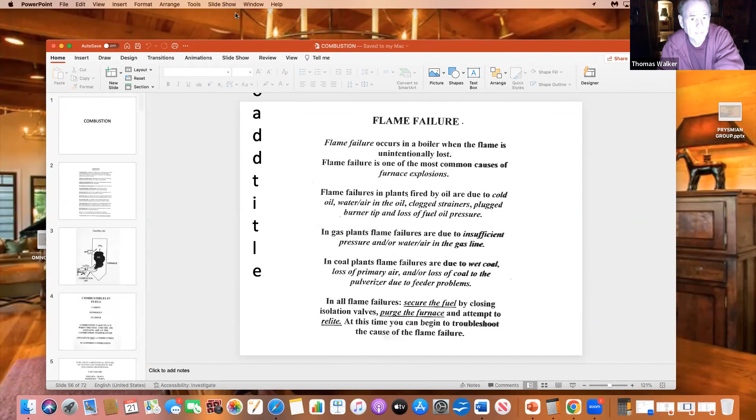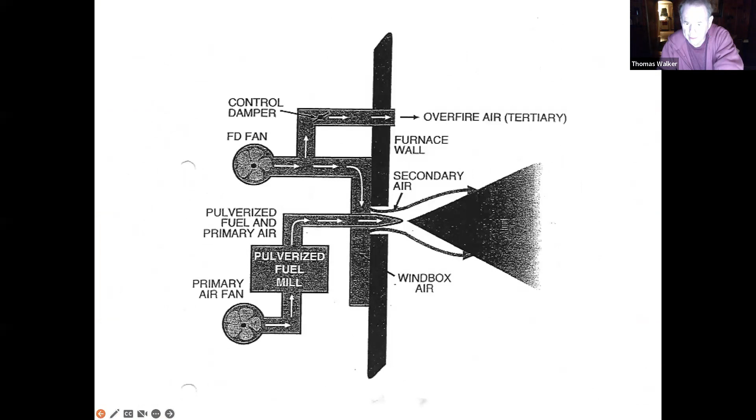On tonight's agenda is combustion. That combustion section, hold on a minute, let me get back to the page here. Should be the next section in the book. And basically how it starts is with a bunch of definitions, just like every other section.

All right, what you need to know about combustion. Combustion is something they taught you in 4th grade science, everybody knows what it is. The way it's worded on the state exam, it's defined as a chemical process in which a combustible unites with oxygen, producing heat and often light. And the way that question's set up, they give you the definition with a blank in front of it, so all you really need to do is memorize the definition of combustion to answer that question correctly. Even if you looked it up in the dictionary, which says the rapid union or oxidation of an element or compound with oxygen that results in the production of heat, you'd get it right.

So I don't care how you remember it, but they're going to ask you, what is combustion, or what is the definition of combustion? So you know that's coming your way.

In the combustion world, in our actual day-to-day practice, I think everybody gets it that combustion happens continuously in a boiler, and in this day and age it's automatically controlled. The only thing an operator has to do is periodically check, see how it's doing, make sure everything looks good.

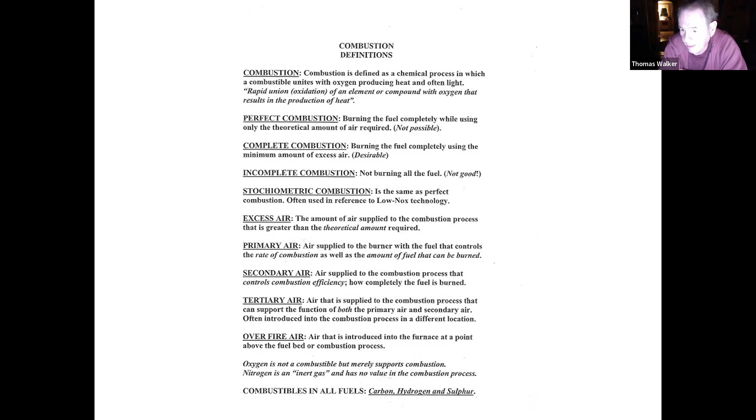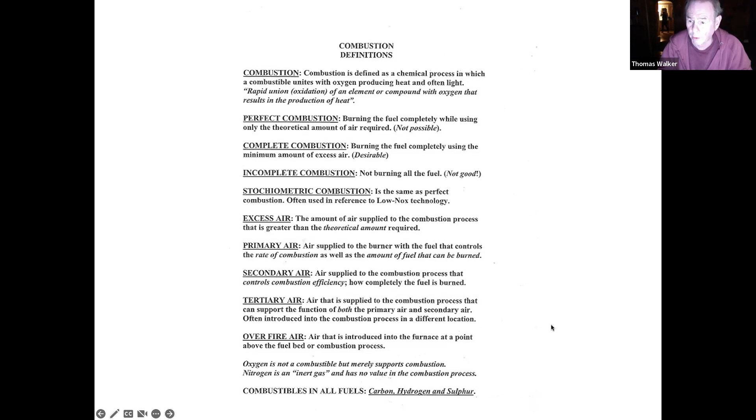Now, for third engineers and first firemen, they're likely to ask you about tertiary air and overfire air. Typically they don't ask second firemen, but let me give you an example. When you have a fuel that's difficult to burn, I'm talking any solid fuel like coal or trash, part of the problem is this: we put the trash in the boiler, in the furnace, and we hope that it burns in suspension.

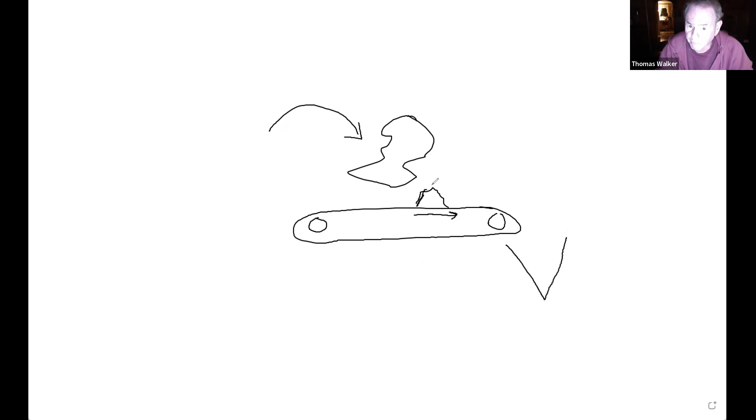However, because it's a difficult fuel, some of it often lands on this traveling grate, which is moving pretty slowly in this direction. When it gets to the end, what's on the grate dumps into an ash hopper where we collect the ash. In trash plants, to make sure that this unburned fuel has an opportunity to burn, they often introduce tertiary air under the grate to make sure that we get complete combustion before this dumps off into the ash hopper.

The object of the game is to burn the fuel completely. I think everybody understands the concept of overfire air. If this was the combustion process here, any air that I introduce up here will assist in getting complete combustion. Typically what they say in most combustion processes is: right here, the fuel is burning to CO, and the addition of that overfire air allows that fuel to burn completely to CO2. Does this make sense?

Now, they won't beat up a second fireman on this because you haven't been in the industry, but this is a favorite question for first fireman, third engineers, especially if you're a veteran of a trash plant.

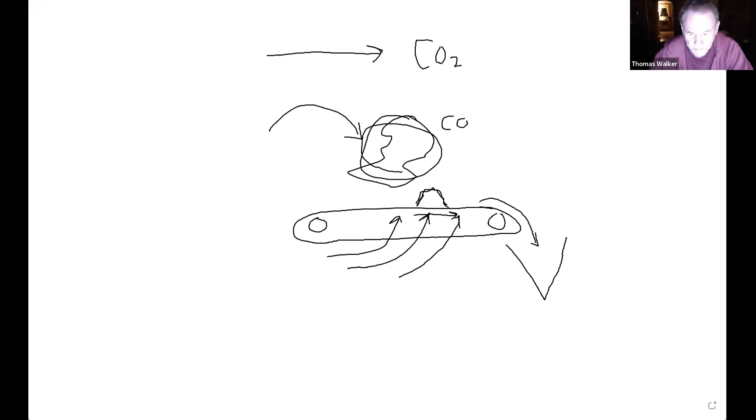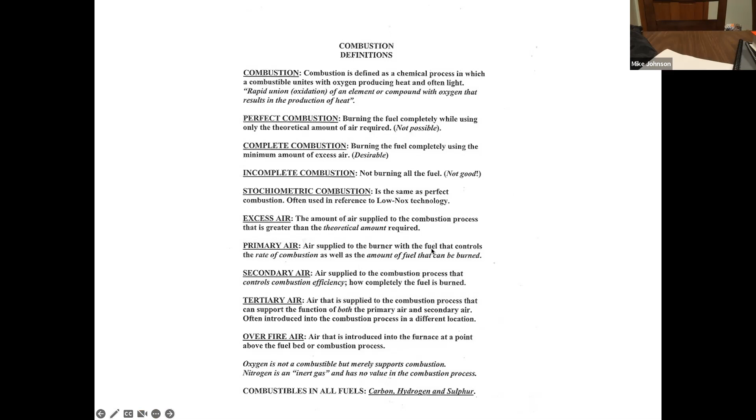So I just have a question about that tertiary air. Does that start right away, like on the grate, or do they try to burn it first normally, and then, say the last third of that moving grate, is that when they put the air in, or is it adding the air the whole way? Yeah, typically it's entered the entire length of the grate because the fuel is so inconsistent. Think about it. You get a load of fish heads, right? They get thrown in the furnace, you don't know what's going to happen. Or they might be Christmas trees, or something that burns real fast.

That's it, they never know the consistency of it. Now, some facilities like SEMASS will shred up the garbage and try to get it to burn in suspension. Other plants, called mass burn plants, start right out by dumping the fuel right onto the grate. So there's different technologies and different types of plants, but basically this sums up what everybody's trying to do. And again, the person they're likely to beat up on this are the veterans, people that have worked in trash plants.

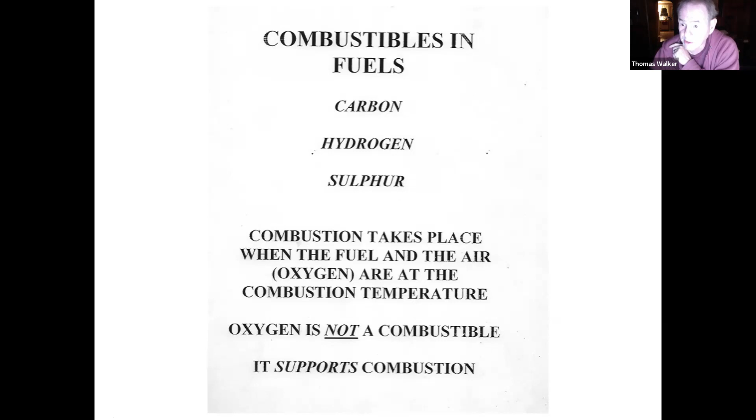They'll often give you a list of combustibles and they'll put oxygen on the list. Oxygen is not a combustible. Oxygen does not burn. It only supports combustion. Any questions?

Not generally part of the combustion section of questions, but a miscellaneous question that's very related to combustion is how much oxygen is in the air we breathe. By volume, it's 20.91%. Close enough that most people say there's 21% oxygen in the air we breathe. Does everybody get that? We kind of like to round things up. So either 20.9 or 21% works.

The difference is nitrogen. Now you'll notice that there's two percentages here. The first one, percentage by volume. That's important for second fireman. That's the only thing they'll ask you. For third engineers, they often ask you, what is the percentage by weight? And it's slightly different because oxygen is heavier than nitrogen. So the percentage is slightly skewed, with 23%, 23.15% oxygen.

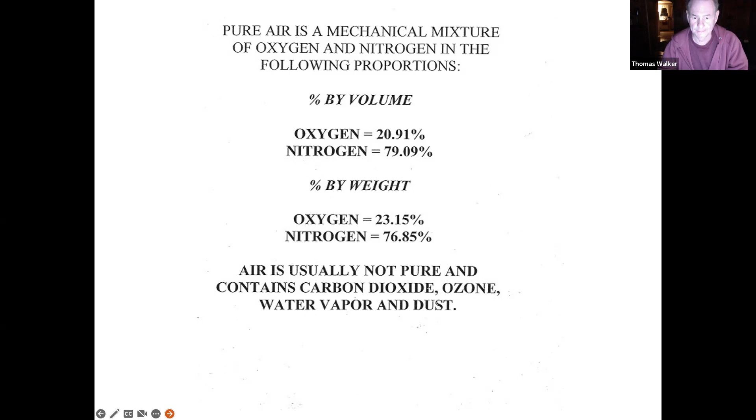Nitrogen, obviously, about 80% of the air we breathe contains nitrogen. Nitrogen is what they call an inert gas. It is not used in the combustion process. Part of the problem in conventional combustion is we introduce air to get the oxygen we need to burn the fuel, and the nitrogen comes along for the ride. It heats up and it goes out the stack, resulting in the biggest heat loss in any boiler, the heat that goes out the stack.

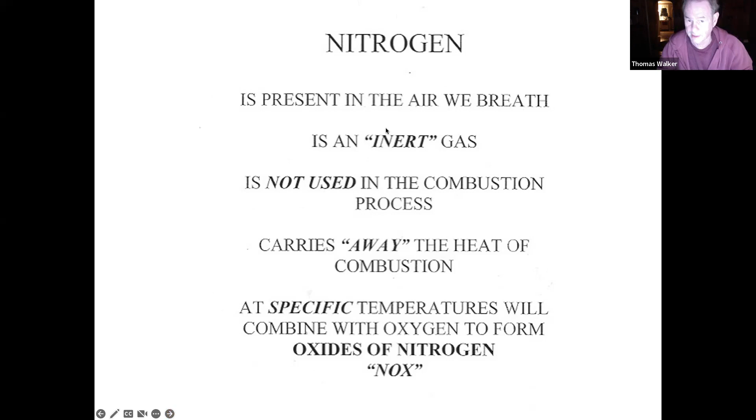Now, there's one kind of sinister side to nitrogen in the combustion process. At temperatures right around 2,300 degrees, which coincidentally is the temperature that most combustion takes place at, oxygen and nitrogen in the air we breathe disassociate. They come apart, due to the temperature. But as those gases cool, they try to reformulate, but they never get it right. They don't always combine in the right combination.

So what we end up with are what they call oxides of nitrogen. You can get NO, NO2, NO3, N2O. You get the idea. Collectively, these things are known as NOx. It is the number one criteria pollutant in the United States. Causes smog, basically ground level ozone.

They're not going to beat Second Fireman up at all on NOx. There are no questions in the database. They don't expect that you'll know anything about it until you get in the business and start working. However, for third engineers, if your plant is doing something to lower the NOx, if you work at a gas turbine plant, that might be SCRs. In a small boiler plant, it'll be burner modifications, low excess air. Be aware of it if anything like that is happening at your plant.

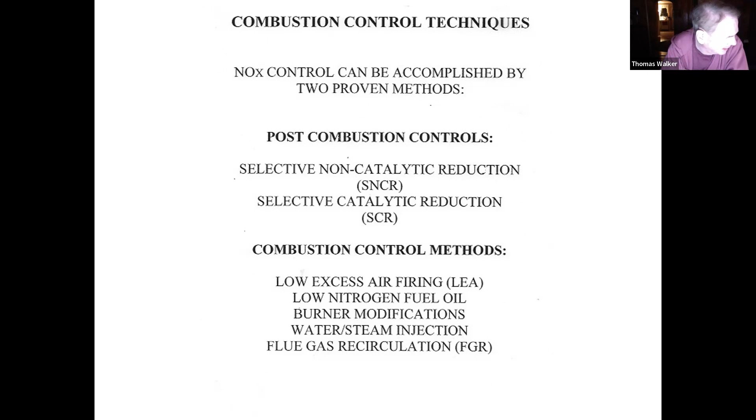We won't bore everybody else with the details, but they're likely to ask you specifically during the oral part of the exam how that whole process works.

Because you live in Massachusetts, sulfur is no longer a big issue. The state has regulated sulfur out of anything we burn, including gasoline and diesel fuel. If you've ever pumped your own gas, you've seen stickers on the pumps showing the maximum amount allowed by law of sulfur. So sulfur emissions aren't a big deal anymore in Massachusetts.

Sulfur, when it burns, mostly burns to SO2, sulfur dioxide. When it mixes with water vapor, it causes acid rain, and that has pretty serious environmental impacts.

People that work in trash plants are the only ones who really have to worry about sulfur, because when you burn garbage, the biggest component of garbage today is packaging, and most plastic packaging for prepared foods and whatnot is a petroleum product. Petroleum contains sulfur, so only the trash plants really deal with it.

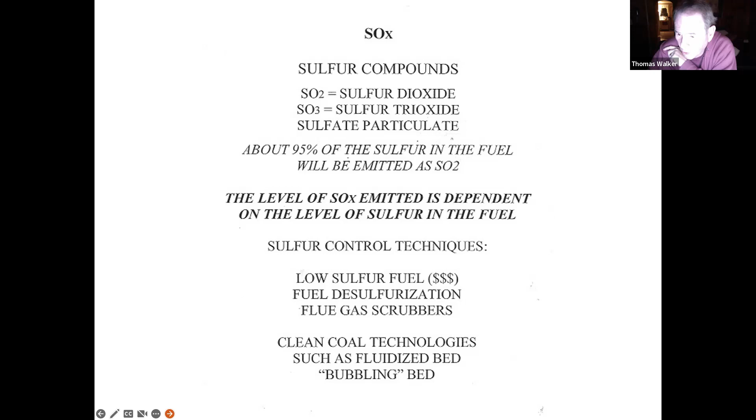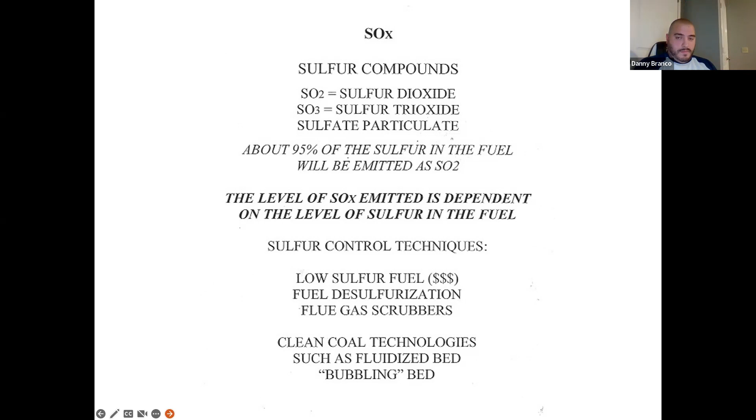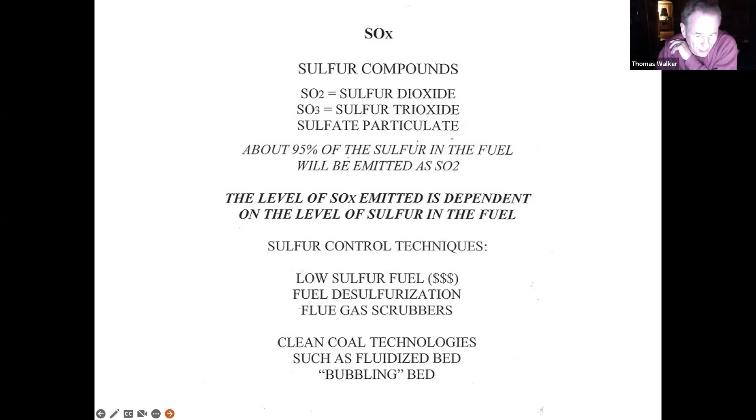Does anybody still work at a trash plant out there? No. Danny, you did, right? Yes, that's correct. And they had flue gas scrubbers, right? Yep, we had an atomizing unit for each boiler that sprayed lime to neutralize the sulfur. That's a blast to work with, that stuff, right? Yep. They mix the lime with water to make a slurry, then atomize it and spray it into the flue gas. Yeah, it looked like a milkshake once it was all mixed together. Pretty messy as well, right? Yep. If you were assigned that duty, you weren't happy. I don't think there's any way you can do that job and not get lime all over you, especially when the hoses would break and start spraying all over the place. Yeah, that sounds like fun.

Now, just a couple things that might come up on the test. Everybody here knows we already mentioned it: the combustibles in fuel, one of the big ones is carbon. When you burn carbon, you produce heat. The other things you produce exclusively are either carbon monoxide, CO, or carbon dioxide, CO2.

Even though it's not great for the environment, what's desirable in the combustion process is to produce the highest possible amount of CO2. We don't want to produce any CO. The reality is carbon dioxide and carbon monoxide will either one kill you pretty quickly. But the point is this: when you burn carbon completely to CO2, you liberate about 14,500 BTUs. If you burn it incompletely to CO, you only get about 4,000 BTUs. So there's a big economic penalty as well for not burning carbon completely.

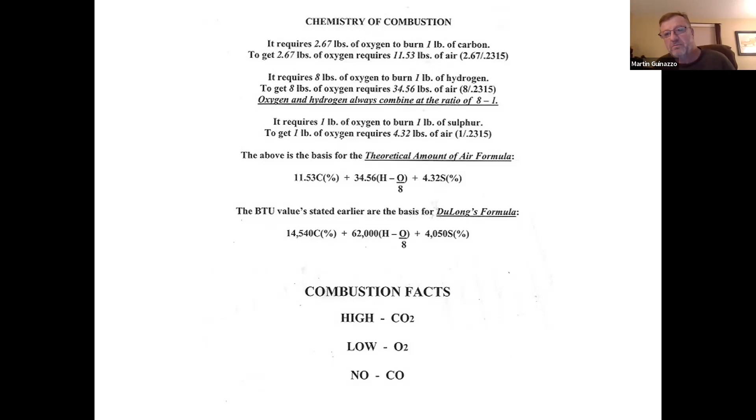If they ask you, a high CO2 reading in the combustion process is a good indication of blank - what would you say to that? Complete combustion, or high combustion efficiency. Low CO2 would be the opposite, right? Or if I had high O2 in the combustion process, that's not desirable - that's poor combustion efficiency. Or if I had the presence of CO, again, poor combustion efficiency. So just remember that high, low, no - it'll get you through most of those questions.

Now, just above that, there's something they're never going to ask second firemen. This theoretical amount of air formula tells us that we can calculate how much air it takes to theoretically burn any fuel. And right below that is a famous formula known as Dulong's formula that allows us to calculate the heating value of any fuel, how many BTUs per pound, based on analysis. What that means is we send the fuel sample out to the lab. They send it back and say your fuel has this percentage of carbon, this percentage of hydrogen, and this percentage of sulfur. Plug in the numbers and we can calculate the heating value of that fuel.

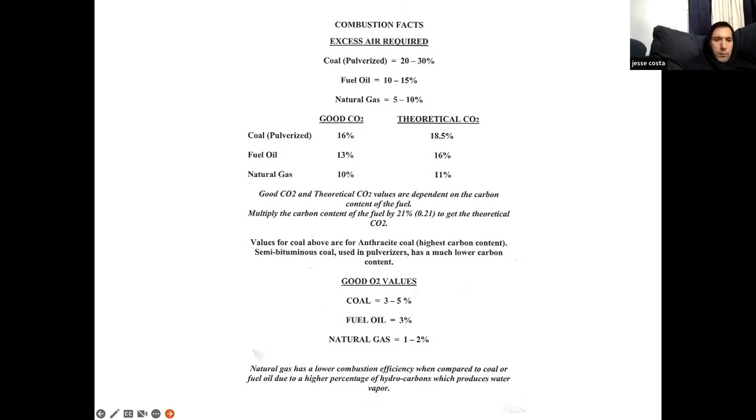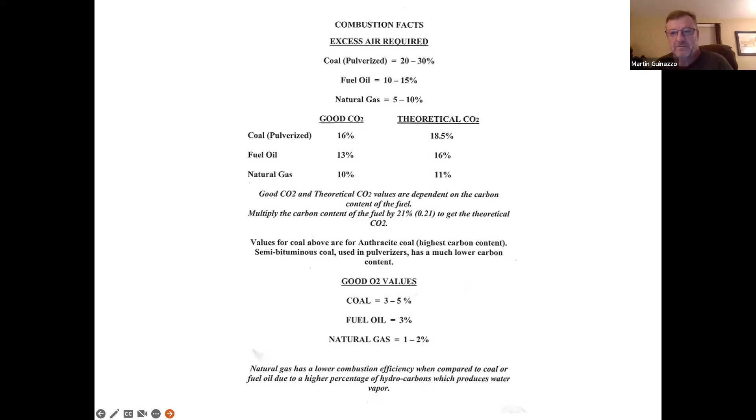Now, one thing about carbon. Both coal and fuel oil contain relatively high amounts of carbon. The problem with carbon is this: 100% carbon is very hard. In fact, the one thing that you and I know about that's made out of 100% carbon is what? Diamonds. Excellent. Now be careful - never throw your girlfriend's diamond ring in the fireplace. It's 100% carbon and it will burn. Does everybody kind of get that?

But coal that contains high amounts of carbon is known as anthracite coal. It's so hard that we can't pulverize it. We have to burn it on a traveling grate. It can't be crushed up because it's harder than the equipment that we use to pulverize it, right?

Typically, most fuel oils contain carbon values around 80%. Natural gas contains the least amount of carbon. As a result, when you burn natural gas, you get the lowest CO2 reading. The point I'm trying to make is this: the CO2 reading that you get burning a fuel is completely dependent upon how much carbon the fuel has. Does that make sense?

Now they have one trick question kind of related to this on the state exam. If I told you I had 1 pound of carbon and I burned it perfectly using only the theoretical amount of air, what would be my CO2 reading? Zero? Not bad, but it's incorrect. What would be 0 would be the O2 reading.

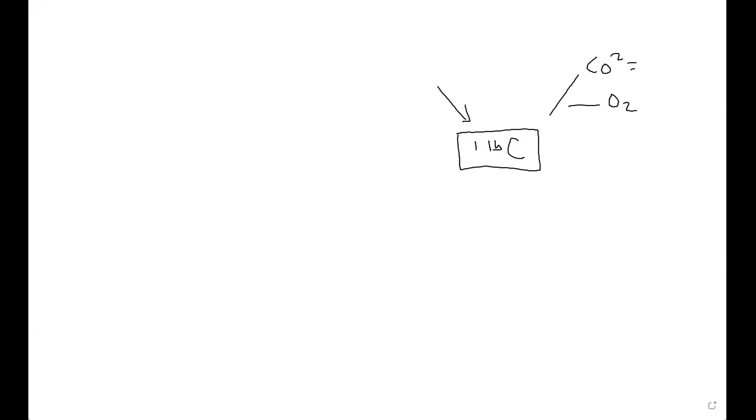What would the CO2 reading be? 100%? Ooh, but only 100% of what? No - 20.9%. Does everybody get that? If I bring in just enough air to burn this perfectly, meaning I have no excess air, I would have 0% oxygen going out the chimney, but my CO2 reading would be 20.9%. That's because that's the amount of oxygen contained in the air we breathe. Excellent. And I didn't have any extra here, so all that oxygen would combine with the carbon to form CO2.

Everybody kind of gets it.

Now, in the same kind of vein, same way of thinking, the good O2 values for coal, I would expect to see 3 to 5% coming out my stack when I burn coal. By the way, one thing you might want to write down: a 3% O2 reading in the flue gas is about 15% excess air.

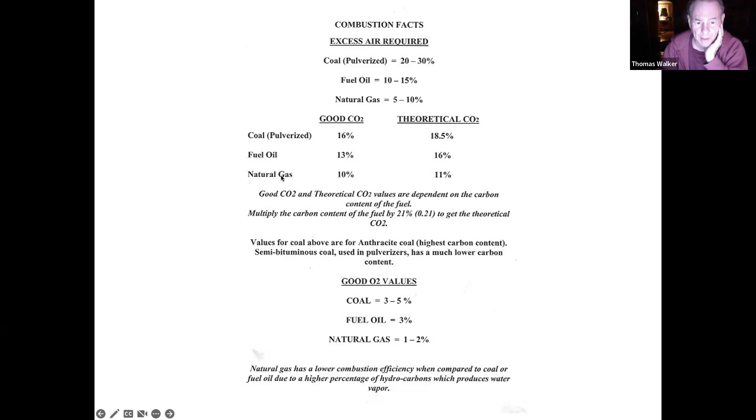Now, one of the things that most people have a little trouble buying into is this: if I had two identical boilers side by side, this guy burns natural gas, this guy burns oil - which boiler would be more efficient? Gas? The oil-fired boiler would be about 84% efficient.

The natural gas-fired boiler would be about 80%.

Why, you say? Because of the higher hydrogen content. When you burn hydrogen, what's one of the byproducts? Water vapor, H2O. You ever been at a traffic light and looked at the car in front of you and seen water coming out of the exhaust pipe? Gasoline has a very high hydrocarbon content, so it produces a ton of water vapor.

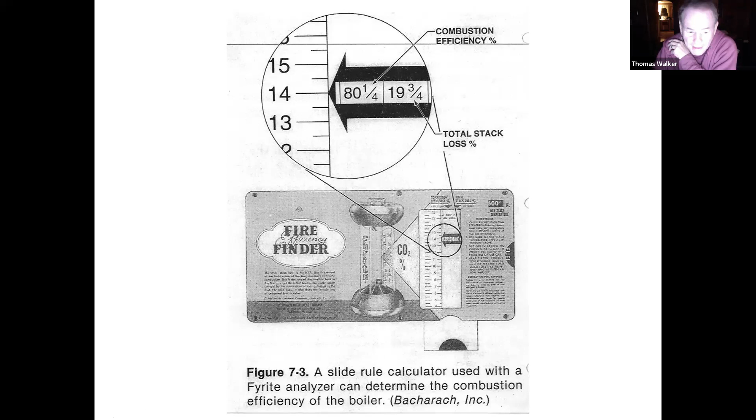You then plug that number into a slide rule, and it basically tells you boiler efficiency. These things are relatively accurate, but they've been replaced today by electronic gas analyzers.

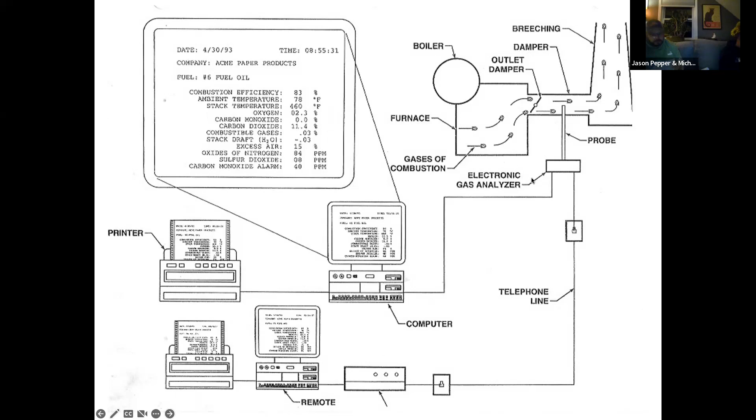Today, many boilers, such as Cleaver Brooks fire tube boilers, have these built in right on that control panel. So at any given moment, you can read things like combustion efficiency, outside air temperature, stack temperature, anything that you want. Does anybody have any equipment like this on their boilers? Pretty nice, right? Gives you a snapshot of how your boiler is doing at any given moment.

Today, this equipment is required in moderately sized plants. Eventually, it'll be required in all plants. But the key is the information goes to some computers, generally in the control room, for use by the plant operators, but eventually to the DEP. That's the Department of Environmental Protection here in Massachusetts, where they can keep an eye on you as well, to make sure you're being a good neighbor and doing all the right things.

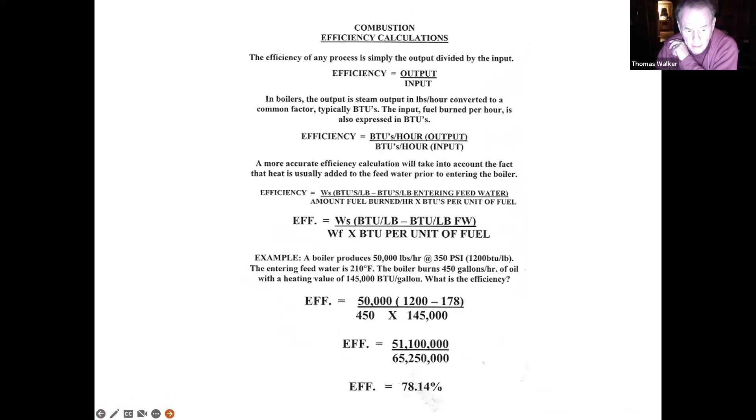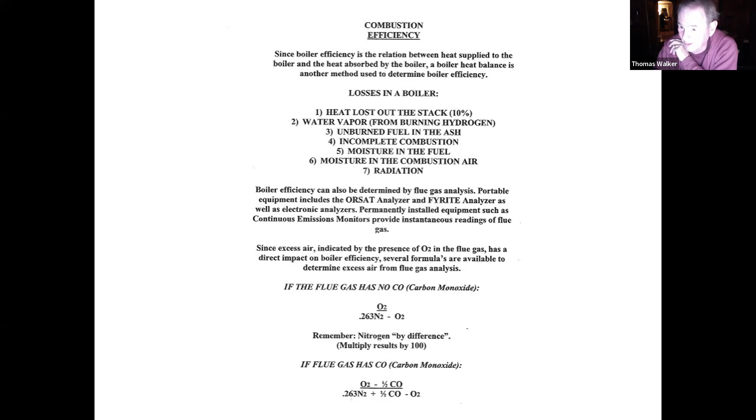So for third engineers, they're going to ask you, can you name three ways to calculate boiler efficiency? The first way is by mathematical formula. The second method is by a boiler heat balance. And the third method is by flue gas analysis. By far, the most popular and easiest one today is flue gas analysis. No involvement from me and you, and that's what we like, right?

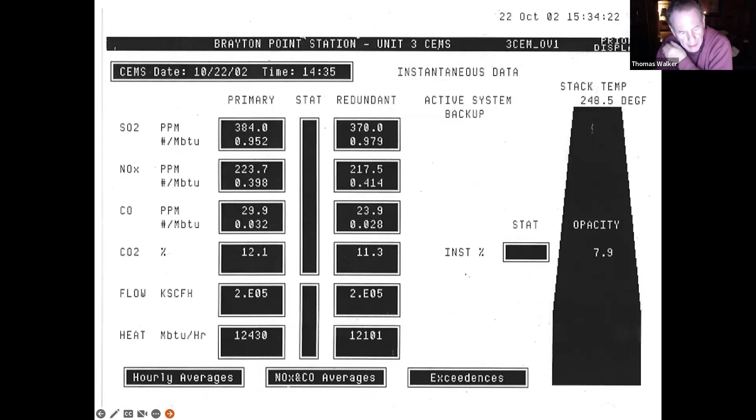It wasn't that long ago - in fact, I'll tell you exactly, 10 years ago, almost to the day, is when I updated this page. And at that time, over 50% of the electricity that we generated in this country was by coal. Guess what percentage is by coal today in New England?

In the United States, it's down around 32% and it's dropping fast. That's good news for you because they've eliminated most of the coal questions from the state exam. And that's only fair, right? We're not burning any coal. I think that place in Bow, New Hampshire is still open - they still burn a little coal up there, but I don't think that's long for this life.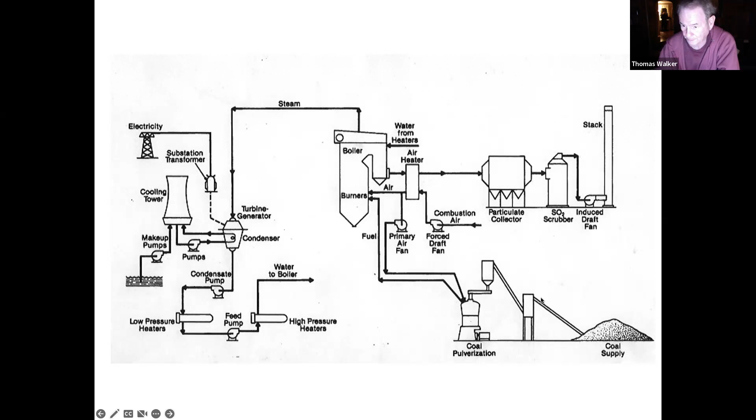The other thing I just want you to grasp about coal is this: you can't get a pickup truck full of it, or even a tractor trailer. You need mass quantities of it. At Brayton Point, we got 40,000 tons delivered every 3 days, and the only way we could get it there was by ship.

They won't ask you anything about this, it's just for your own information. The other alternative are coal trains. If you've been in other parts of the country, places like Florida or Nevada, they have huge trains, a couple hundred cars long, delivering coal to these coal burning plants.

Now, one of the technologies they used in coal was a technique called tangential firing, or tangential burners. In these burners, the actual burner nozzle is in the corner of the boiler. Remember, the pulverized coal is crushed up, mixed with air, and literally blown into the furnace through pipes. Because it was traveling at high velocity, if that fuel hit the walls of the boiler, it would be like sandblasting and would have an erosion effect on the boiler surfaces. So what they did was come up with tangential firing to keep the fireball, the fuel, in the center of the furnace away from the walls.

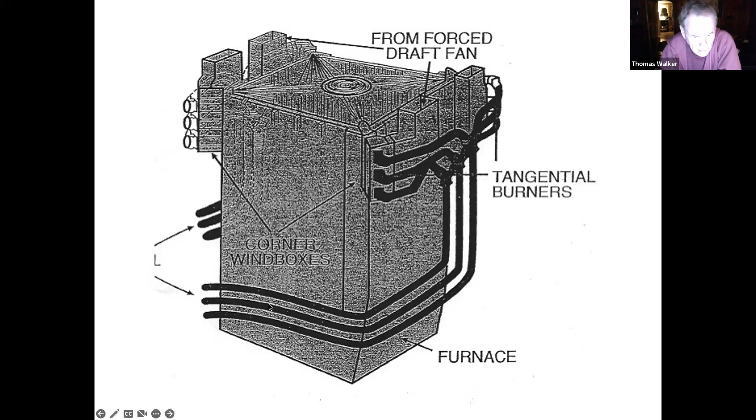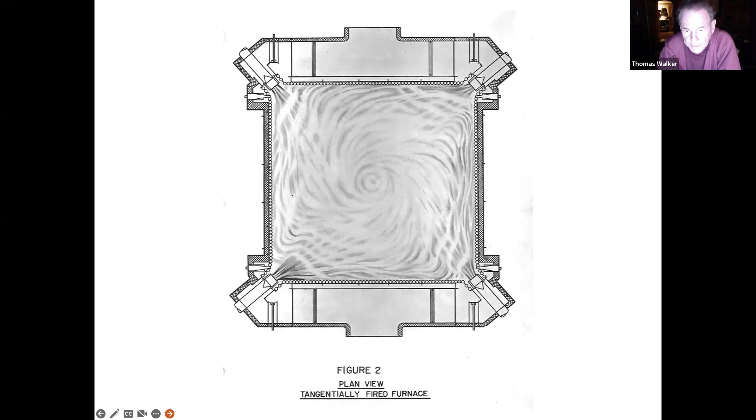I think I stuck a couple other shots in of tangential firing. You probably don't have this picture, but it's just a better picture showing you what's going on. This shows you a single line diagram of one of the boilers at Brayton Point that had not only tangential firing, but also what they called a split or divided furnace. You can see the pulverizer, the coal pipes, and how the fuel got distributed to the various levels in the boiler.

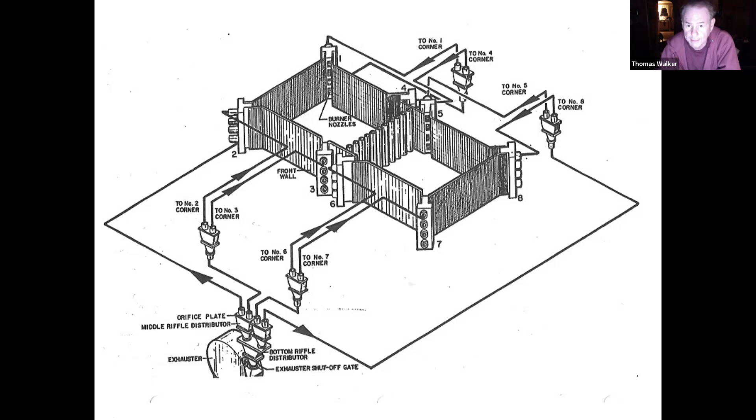Way back when we talked about controlling superheat temperature, I told you that one of the techniques they used was tilting burners. Probably most of you will never see this, but this is an actual burner from a coal-fired plant. The concept of tilting burners, you can see right here. I could tilt the burners away from the superheater to help control the temperature, or conversely, tilt the burners up to get more superheat temperature. These burners typically had a range of about plus or minus 30 degrees, where they could tilt up or down as needed.

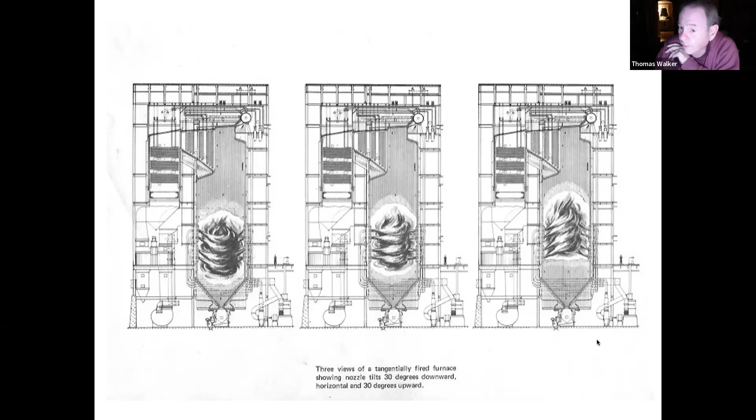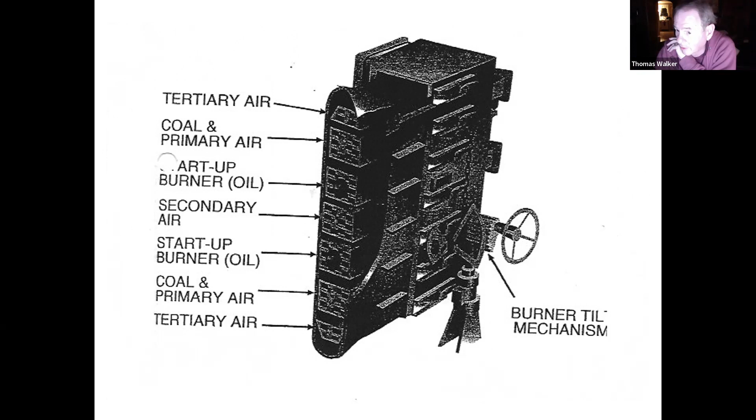So you could move them in the field. Well, you could move them from the control room, but you could also manually move them locally by a hand wheel. At Brayton Point, though, they were hooked up pneumatically, so air pressure could manipulate them or position them. They looked more like this, but this whole assembly would tilt up and down.

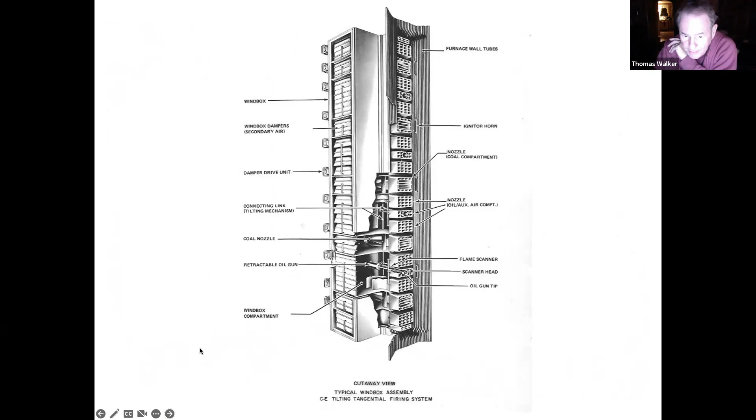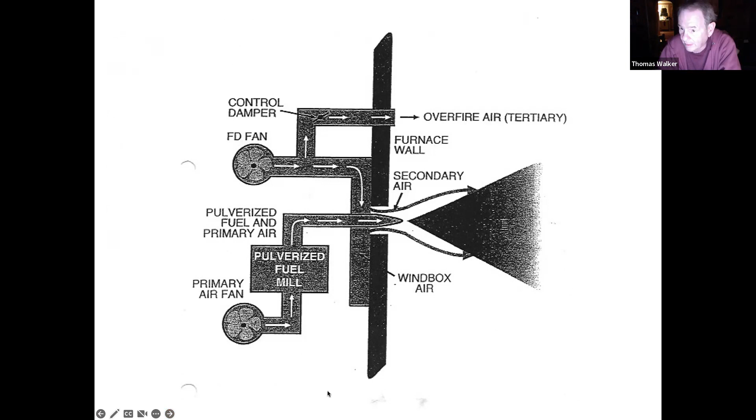In a coal plant, they'd take the fuel, crush it up in a pulverizer, and add heated air, and that mixture would go to the burner. Then they'd provide over fire air to get complete combustion. A little bit different than a conventional combustion process.

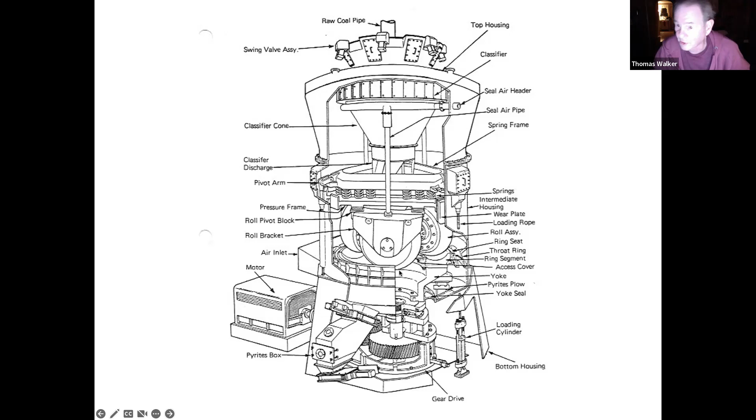A pulverizer was just a big machine with basically three big wheels that spun around. The coal would be fed in and get crushed up by these wheels. The heated primary air would pick it up and try to pass it through a screen with a pretty tight mesh, called a classifier. If the coal didn't pass through the classifier, it fell back in and got crushed up a little more until the pieces would fit through. It was like the consistency of baby powder, crushed up pretty fine.

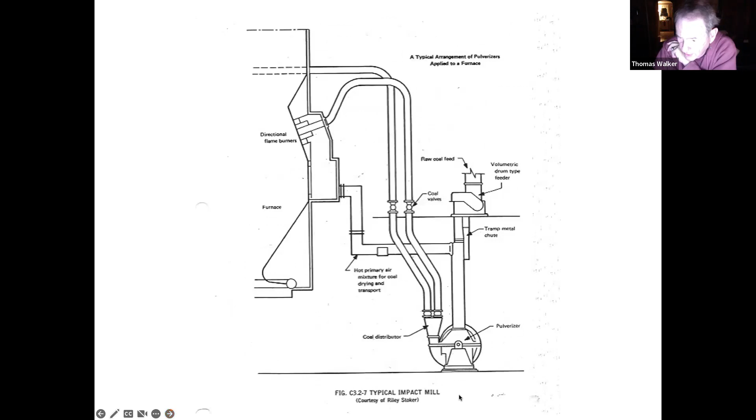They used to ask third engineers, can you name three types of pulverizers? There was an impact mill, a bowl mill, and my favorite was the ball tube mill. This was a big metal tube filled with baseball-sized steel balls that rotated around. The coal was blown in there and got crushed by these steel balls. Pretty primitive. In fact, most coal technology hasn't had any improvements since the 1940s. We're still doing it the same way. There's nothing to improve upon.

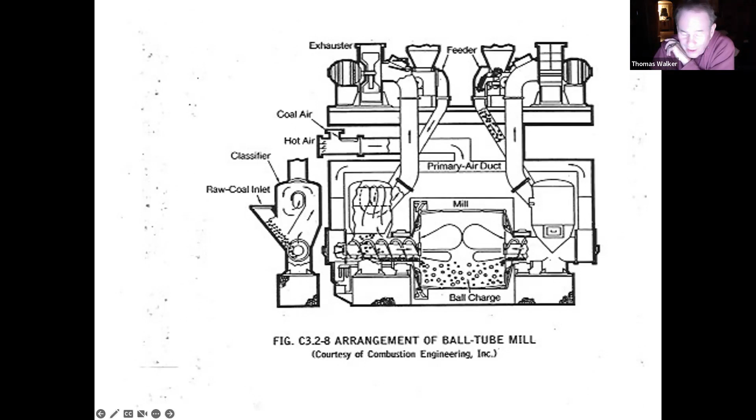This shows coal would be put in a silo inside the plant. It would feed by gravity to a coal feeder. The coal feeder would provide the pulverizer, and the coal pipes would deliver the fuel to the burners, ultimately to the boiler.

Some graphics showing you how you control the combustion process. This is a picture of a pulverizer with the exhauster, lube oil pumps, and all that related equipment. None of that's important, they're not going to beat you up on this.

One of the interesting things is how they burn the hard coals, the anthracite coals, throughout the rest of the country, on these chain grate stokers. This is the technology they use to burn trash today. For instance, at a plant like SEMASS, they would blow the garbage in. It would try to burn in suspension, but would end up on the traveling grate. This thing rotated pretty slowly, dumping off the ash at the end into an ash hopper. They would deliver air underneath the grate, that tertiary air, to get this fuel to burn completely.

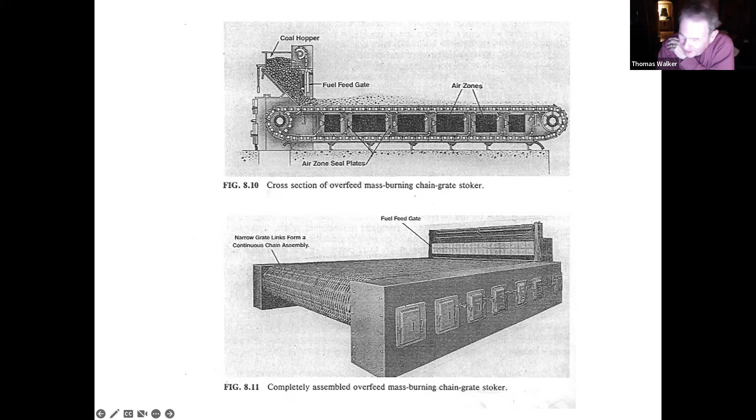A coal feeder is a real simple device. Gravity fed the coal onto a belt. Equipment made the coal a uniform height, and what you controlled was the speed of the belt. You could make it go faster or slower, dumping the coal into the pulverizer and ultimately into the boiler.

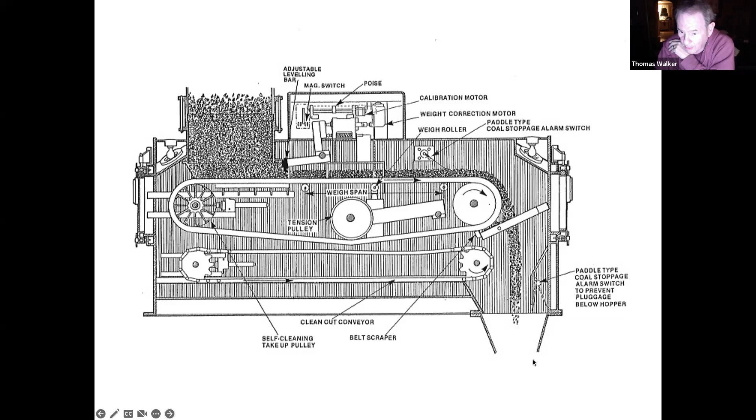Now, the other thing they asked second firemen, kind of related to coal but could also relate to trash or oil, is slagging. Most people know that slag in a boiler is the molten ash that adheres to boiler surfaces.

When the boiler is hot, this isn't a big deal. However, as you can imagine, what happens to that molten ash when the boiler cools down?

That ash becomes very hard, like concrete, and somebody's got to remove it. That's not a fun job, you jackhammer for hours. Is that right? Yep, yeah, that job sucked, huh? I had to do it many times. It really did suck. Yeah, when they hand you a jackhammer in any job, you know that's not what you signed up for.

But everybody gets slag, right? So they'll ask you, what is slagging in a boiler? It's just molten ash adhering to boiler surfaces. It becomes a real issue because to get in the boiler, you have to cool it. Once the ash gets cool, it gets hard like cement, and as Danny says, when they hand you a jackhammer, good luck.

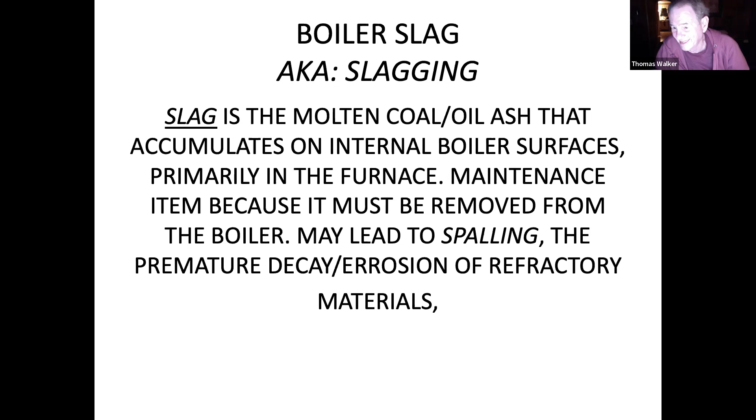This is obviously detrimental to boiler operation. The slag typically gets on the tubes in very hard to access locations. Everybody kind of gets this. So yeah, cleaning it is not as simple as whipping a jackhammer on it.

The other term that comes from the coal industry is spalling. Slagging and spalling kind of go hand in hand. What happens is that molten ash sticks to the boiler surfaces, it gets cool, and it gets heavy. As it falls off, it has a tendency to pull refractory material off the boiler walls.

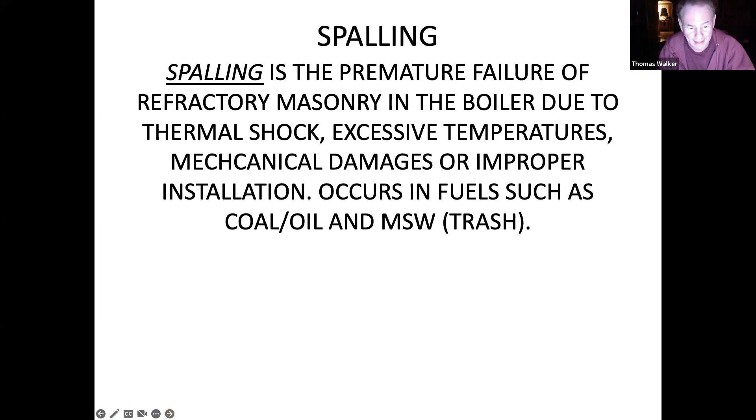Where it happens a lot is right around the burners. What you end up having to do pretty much every overhaul is go in there and patch, with refractory cement, the area around the burners because it's been deteriorated by spalling. Everybody get this? As that heavy molten ash falls off, it pulls that refractory material off with it.

Any questions? So even though there's a lot about coal, they've eliminated most of the questions. So again: spontaneous combustion, flame impingement, tangential firing, maybe tilting burners, slagging, spalling. Expect to see those type of questions on the state exam. But for everything that's happening with coal, it's really not a lot to remember. Any questions?

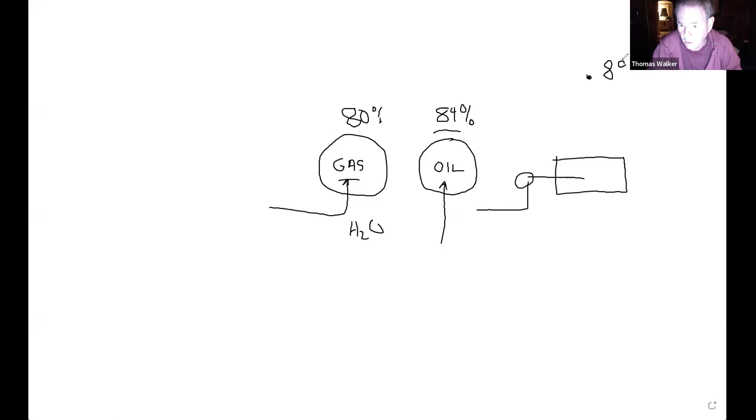And all that is unimportant to second fireman. The only thing that comes up as a math question for second fireman, first fireman, and third engineers is this: if they tell you the specific gravity of any particular fuel, let's just pick 0.89 as the specific gravity, they're going to ask you how much a gallon of that fuel oil weighs. What they're asking you to do is take the known weight of water and multiply it by the specific gravity of 0.89, and that will give you the weight per gallon.

Does everybody kind of get this? It's pretty simple math. That's the only thing that comes up about specific gravity.

At the bottom of the page here is the other question they love to ask about oil: how many gallons in a barrel of oil? Now, they're going to try to trick you on this, and on that question they'll put 55 gallons. If anybody's ever worked in a factory where they have drums of stuff, a 55-gallon drum is a pretty common size.

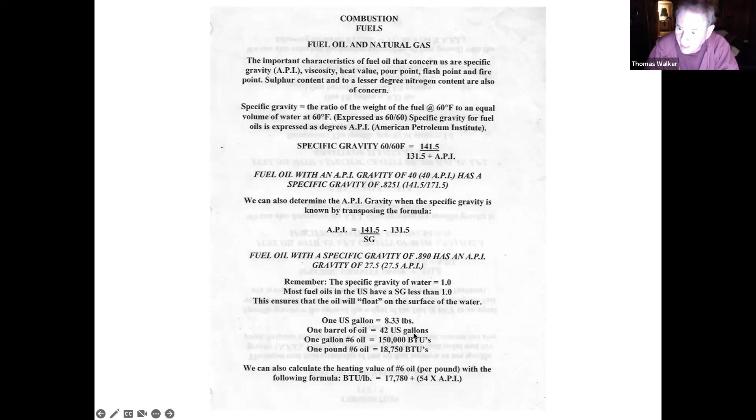What happened in this country, in 1859, the guy that discovered oil on his property was in the molasses business. The barrel he had laying around was a wooden barrel, 42-gallon, used for molasses. He stuck the oil in those molasses barrels, and that became the standard in this country. So today, when you hear the price of oil, they're talking 42 US gallons.

Occasionally, they'll ask you how many BTUs in a gallon of number 6 oil: 150,000. And how many BTUs in a pound of 6 oil?

That's about all they'll ask until you get to these four definitions: viscosity, flash point, fire point, and pour point.

Viscosity for second fireman is pretty simple. All they're looking for is the first line: viscosity is defined as the internal resistance of fuel oil to flow. Probably the thing that makes that easiest to remember is the second sentence, where it says heating fuel oil will lower its viscosity. So heating fuel oil makes it flow easily. Does everybody kind of get that?

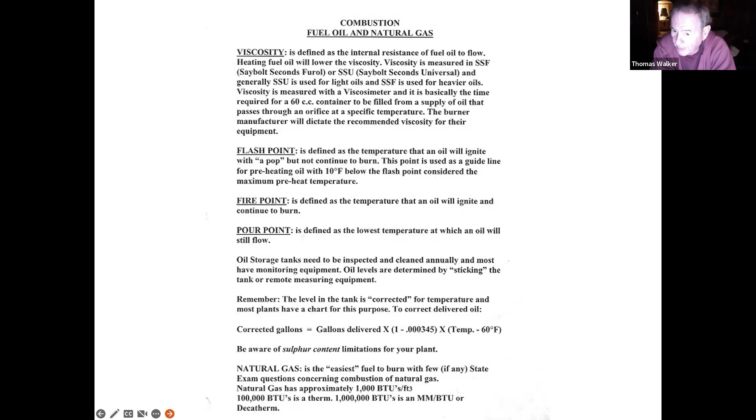Now, at the very bottom of the page, there's only a couple things they ask about natural gas. One is how many BTUs in a cubic foot - one cubic foot of natural gas is about 1,000 BTUs. If you buy natural gas at your house, you pay for it by the therm. A therm is 100,000 BTUs. If you work at a big utility or manufacturing plant, they typically buy natural gas by what they call the decatherm or the MMBTU. Decatherm and MMBTU are 1 million BTUs.

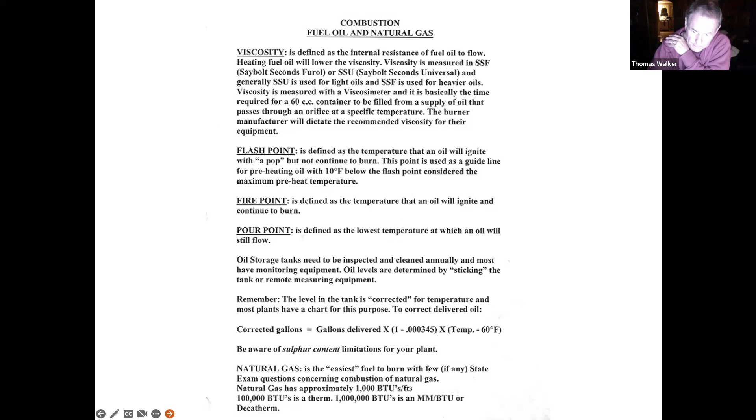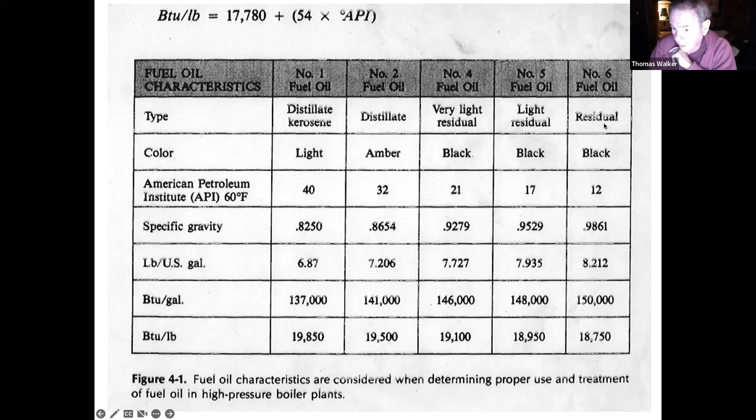The next step is they heat that remaining crude oil up to about 950 degrees, and they drive off what we know as number two fuel oil, home heating oil, diesel fuel. What's left over is what they call residual oil, or number six. In the old days, they called this bunker C. Bunker A was number one oil, bunker B was number two oil, and bunker C was residual oil, or number six.

To make number four oil is simply just a blend of equal parts number two and equal parts number six. Number five oil is two-thirds six oil and one-third two oil. So four and five are nothing more than blended fuel oils.

You can see the only thing that possibly would be of interest to you is the specific gravity and the weight per gallon. Gasoline weighs about 6.8 pounds a gallon. Number 6 oil, about 8.2 pounds per gallon, a little less than water. Again, number 6 oil is 150,000 BTUs per gallon. Number 2 home heating oil is about 141,000 BTUs per gallon. Can't imagine that'll ever come up.

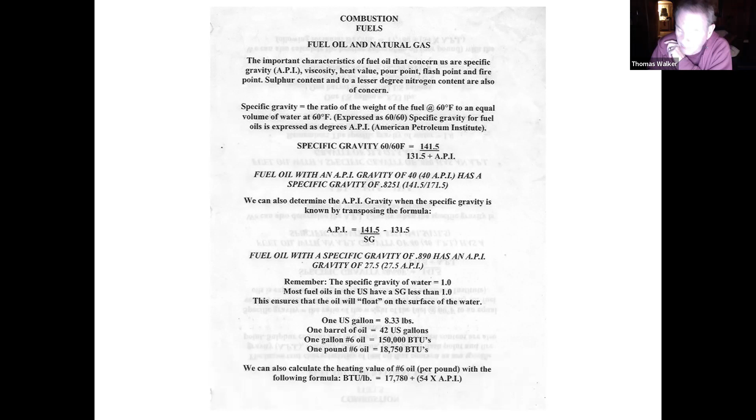Here's the interesting thing: when you accept a load of oil, the delivery ticket will always have the API gravity on it. That's the number they're interested in. You and I could care less. But knowing the API gravity number, we can figure out the heating value of that oil in BTUs per pound. Not that you and I would ever need to do that or want to do that. So it does have some value to somebody, but you and I don't care. Whether we get 17,000 BTUs or 18,000 BTUs, it doesn't matter. But does that kind of help you? Yeah, thank you, yeah.

Don't ever worry about this. Now, specific gravity is something anybody that's bought motor oil has seen before. If you ever look closely at a can of motor oil, if you're going to change your own motor oil, it'll have the specific gravity on it with the number 60-60. That means they're taking that fuel oil or motor oil and comparing it to water at 60 degrees Fahrenheit. That's all it means. So many of you buy oil by the weight, like 30 weight oil. That all is related to specific gravity.

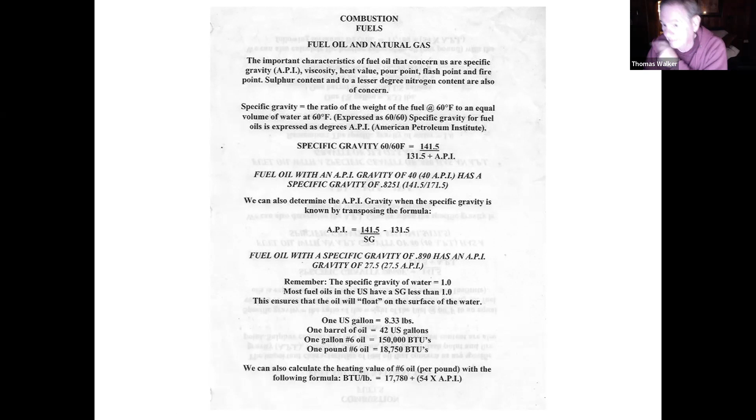Back in the day, they used to have second firemen draw a single line diagram as part of the oral exam of a fuel oil system, just so you could understand it. Today, 90% of everybody's burning natural gas, and fuel oil systems are no longer part of the equation. However, they have a question in the database that asks which of the following components is not part of a fuel oil system. So, as I usually do, I list the things you need, the components you need to burn fuel oil.

You need a fuel oil storage tank. You need pumps to pump the oil from the tank to the boiler, fuel oil strainers to take out any crud in the oil, fuel oil heaters—typically in this business they can be either steam or electric heaters to heat up the oil, to preheat the oil to the proper temperature. You'll need pressure gauges and thermometers on the system, so you got a feel for what's going on.

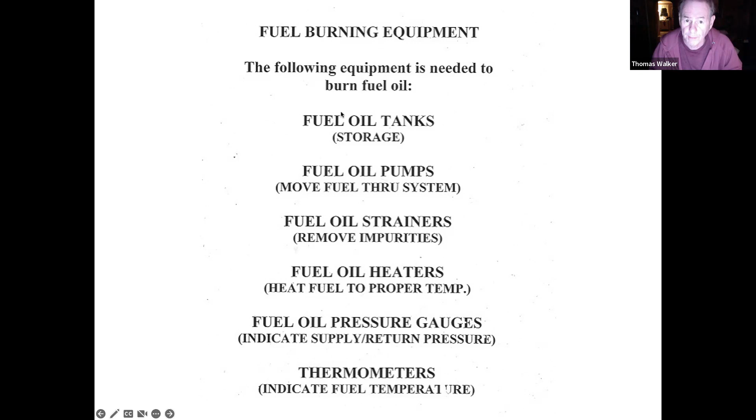But I haven't heard of anybody having to draw this in over 5 years. So let me assure you, it's a relatively simple task if they call upon you to do so. If I was asked to draw a fuel oil system, I'd draw a tank, a pump—you get the idea—some strainers, a fuel oil heater, pressure gauge, thermometer, you get the idea.

Every fuel oil system to the boiler will always supply more oil, with the excess being returned to the tank. Many fuel oil systems have valving arrangements that allow them to pump oil through the heater and back to the tank to preheat the oil, to get it warmed up to the proper temperature. Most fuel oil tanks in New England have steam coils inside the tank, so we can heat the oil that's in the tank. Does everybody kind of get this?

The only other issue that'll ever come up is whose responsibility it is when the truck comes to deliver a load of oil. This has gone to court a bunch of times. What they've decided is that it's the plant operator's responsibility. Once the truck pulls up and puts the hose in your tank, it's your problem now. So most companies are pretty good about it. If it's a cold February at 2 o'clock in the morning, you don't want to have to stand out there and watch this, so most drivers are pretty good—they'll keep an eye on this operation until they're done.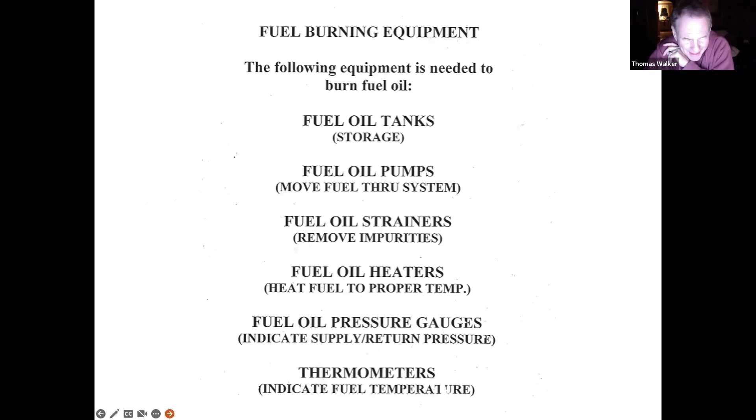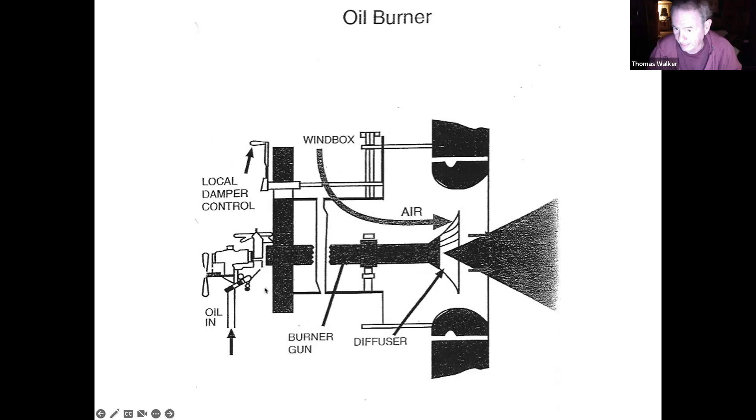But anyway, one of the things I never liked about oil is this: you burn it in an oil burner gun, and they periodically become fouled or dirty, which means you've got to pull the gun out of the boiler, put it on a workbench, and clean it. Cleaning it basically entails taking it apart.

The part that's going to concern you most is the burner tip. It'll come apart. There might be a swirl plate or an atomizing plate behind the nozzle. Throw those components into a bucket of kerosene, Safety-Kleen, or whatever you've got. Clean them up, reassemble it, hang it on a rack, and it's ready to rock and roll, or put it back in the boiler.

Today, most oil guns are what they call steam or air atomizing burners. Back in the early days, the early burners were rotary cup burners, known as mechanical burners. The burner tip actually spun by pressure, and that had a tendency to fling the oil out and break it up into little drops to make it easily mix with air.

Today there are pressure atomizing burners or steam compressed air atomizing burners. These are the most common. However, the question on the state exam is, can you name 3 types of oil burners, or 3 ways to atomize fuel oil? These are them: rotary cup burners, pressure atomizing, and steam compressed air atomizing.

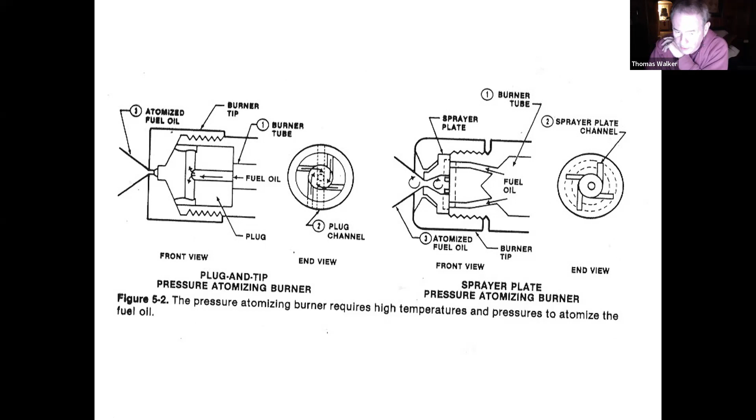Again, the only question for second fireman is, can you name 3 types of oil burners? I got a question on the steam atomizing burner. Does it have to be at a different pressure than the oil feeding it? Yes, what they want is the steam pressure to be 5 to 10 pounds higher than the oil pressure. That way, if the burner gets a leak in that inner tube, the oil won't leak into the steam, but rather the steam will leak into the oil.

Does it matter? I don't think so. No. All right.

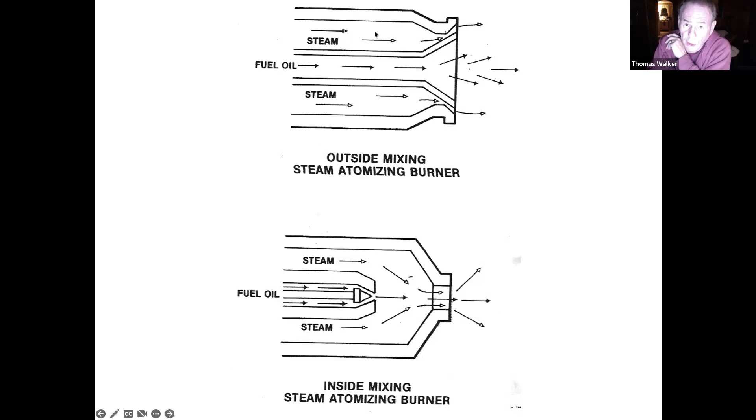Typically, nothing is returned from the burner. Because of that rule, in the fuel oil heaters, which are nothing more than shell and tube heat exchangers like we talked about, the fuel oil is inside the tubes with the steam outside the tubes. Same thing, you want the steam at a higher pressure. So if one leaks into the other, the steam will leak into the oil rather than the oil leaking into the steam, because in some plants they recover the condensate from the fuel oil heaters, and you don't want that contaminated with oil.

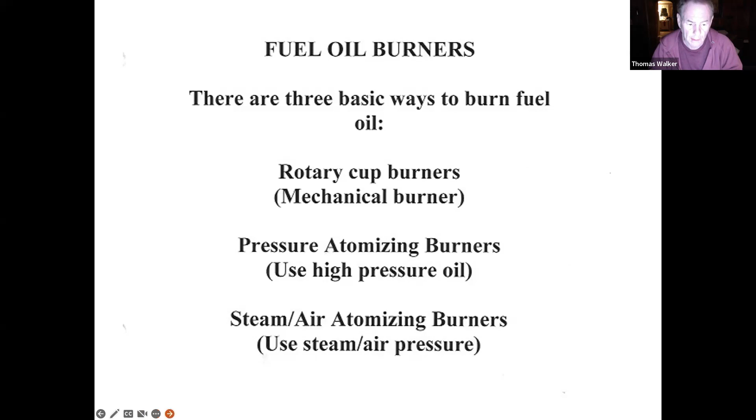Natural gas gets delivered to the burner in a pipe. There are automatic shut-off valves, solenoid valves. Idiot proof.

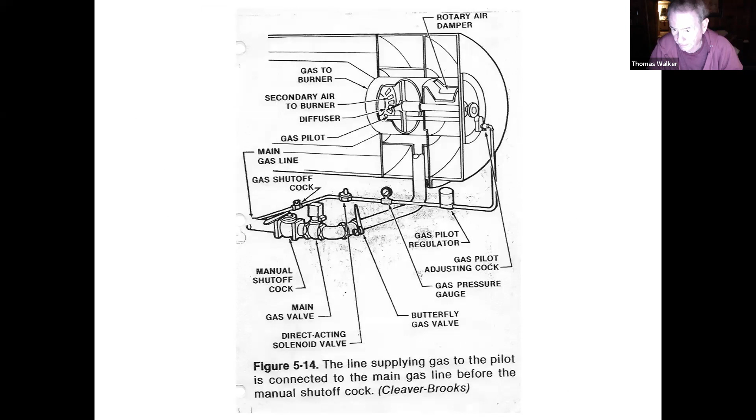One question I saw recently on the third engineer's exam: if anybody looked at the gas piping next to the boiler, all boilers in Massachusetts have what they call a block and bleed arrangement.

In that block and bleed arrangement, there are two electrically operated valves, solenoid valves, and a vent valve. This being the vent valve.

When these valves open, they open simultaneously, and the vent valve closes. When these valves close, the vent valve automatically opens all the time. The idea is if one of these leaks when they're in the closed position, the gas will be vented to the atmosphere, not into the boiler. Does everybody kind of get that?

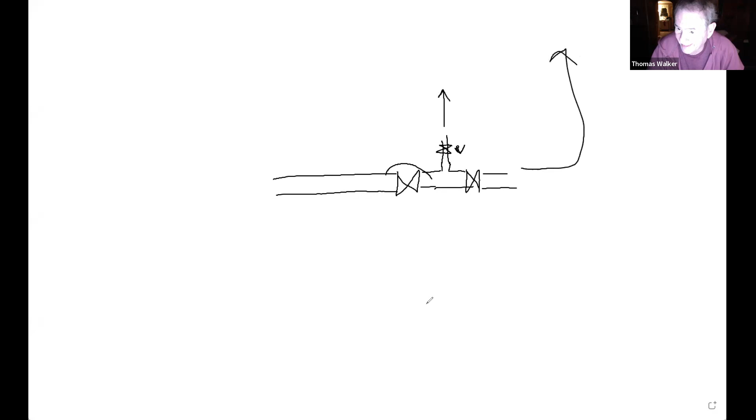This block and bleed setup is on every gas-fired boiler, so if you're in a boiler room, check it out. Make sure you understand how it works. It's a requirement in Massachusetts.

I think there's a manual vent valve too, just to back it up. There is, and there'll be manual isolation valves so you can close off the gas. Even on the vent valve, I think there's a manual backup. I'll have to take your word for it.

In fact, if any of these valves don't do what they're expected to do, you'll get a disagreement in the logic and it won't let you start the boiler. It'll say something's wrong.